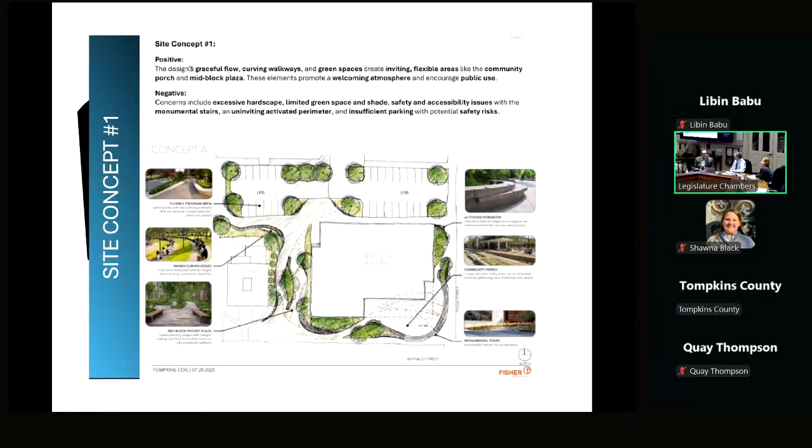Several months ago, we provided some initial sketches, and that's one of which you're looking at right now. These were inspired by local hydrology and geology. Can we go to the next one, please?

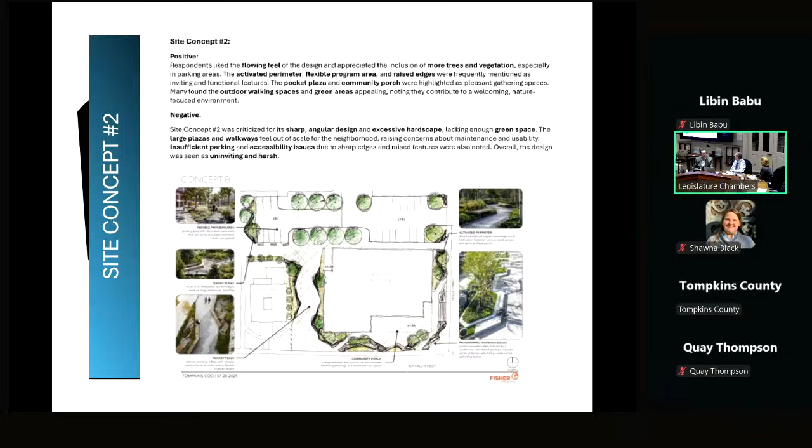We got some great feedback on these, and we also got some great information as part of the survey. Many of the things that folks provided us as important were already incorporated in the initial designs, but we used this feedback to further refine and produce a better design.

What you're looking at right now is an updated design that responds to the feedback as well as the updated building footprint. It incorporates additional requested elements such as secure bicycle storage, as well as locating and screening utilities such as an emergency generator, transformer, etc. And finally, it seeks to reduce the cost of construction while still fulfilling the initial goals of the project.

Some of the refinements we incorporated were to reduce hardscape, increase shade and green space, specific things we're responding to as part of the survey. The building perimeter is wrapped in plantings and built-in seating, stone seating. The main entry includes access both by stairs as well as a sloped walkway.

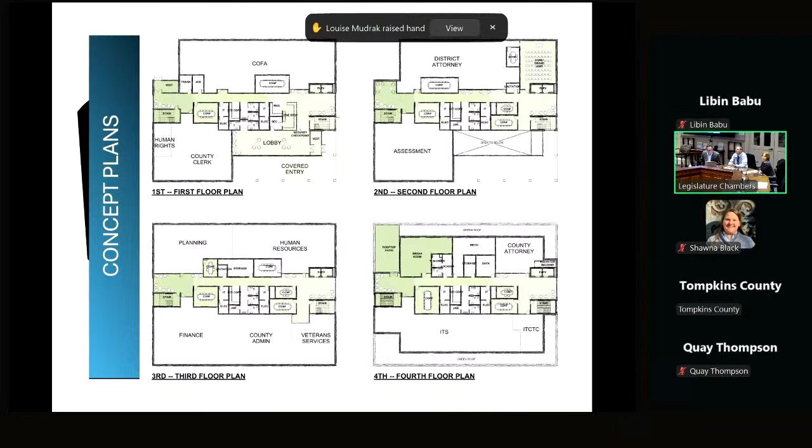It's me again. Thank you.

So I do have a question about the geothermal heating and cooling. I really laud that, and I've heard it might be a kind of neighborhood thing, so that other buildings like the Boardman House could take advantage of it. DeWitt Park is the formative park for the town and city of Ithaca, with churches around it since the 1820s. Are you only talking about putting in geothermal heating and cooling for this building as a separate unit system?

I can address that a little bit. Thanks for the question, Louise.

So we were hoping for a bigger district, but there were reasons that didn't work out. The next step we looked at was a smaller district with just county buildings on this block. One of the things we ran into is that the water table is higher than we thought, so you can only go down so far.

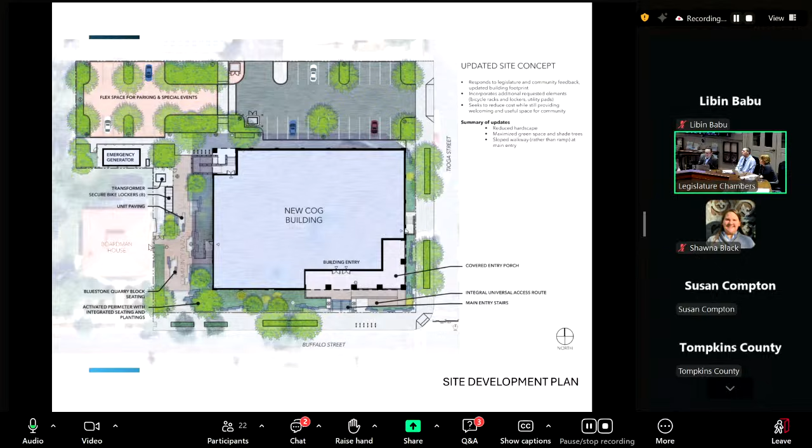Yeah, we believe it's between 28 and 30 feet. Okay, and what would be the measurement between the Boardman House foundation and the nearest piling? I'm assuming you'll be driving pilings down to support the building? No, we're drilling and then grouting, so there wouldn't be any piles, but the nearest borehole would also be 30 feet. Okay, but when they were driving pilings over on

Seneca Street, we could feel the ground move. And you're saying you're drilling, is there less vibration with drilling? Yes. So when you're driving a pile, you're literally just pushing it with a big weight down through the ground. When you're drilling, it's a spinning auger drawing the dirt and sediment up out of the hole as it drills.

Yeah, so I'm assuming you're taking that into account. Yes, no, they're great questions, and we should be well clear of any risk to Boardman or any other adjacent buildings. But having said that, we'll also be documenting Boardman and Courthouse before and after construction, and monitoring both locations throughout the drilling and construction to make sure we're not causing any vibrations that could cause damage to those adjacent buildings.

Okay, and one last question. What ended up being the final height of the building? I'm just wondering how much the Boardman House will be overshadowed by the new building. In the past I was told, in an earlier design, that we would have the space, the width of the current county building, next to us before the new building, but obviously it's a lot closer now. So the height of the new building? Yeah, I think it is.

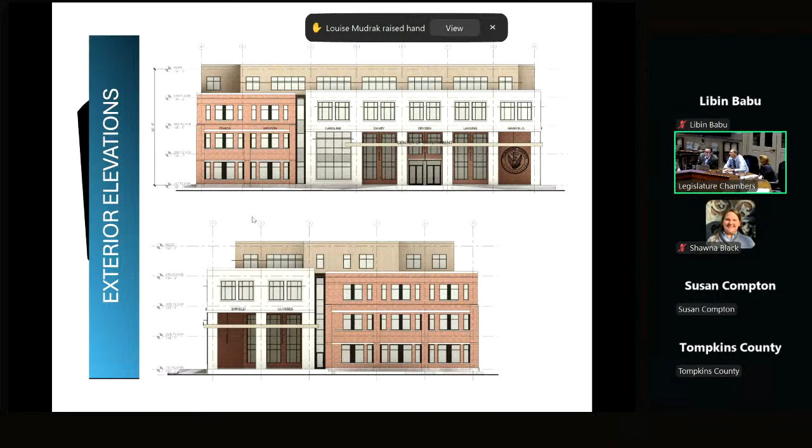I don't know if I can zoom in, but if you look at the top left, this image is really small. It's a 3-story. Here you can see in this elevation that we'll show later, that red rectangle, the 3-story red rectangle, is about the same size as Boardman. What we're doing, in the top left of this image, it would be nice if we can zoom in, but you can see the Boardman House in red. That's the closest sketch that we have. So here's Boardman, and here is the new Center of Government building. We're sort of celebrating and respecting this little square of Boardman with a similar little red square in our building.

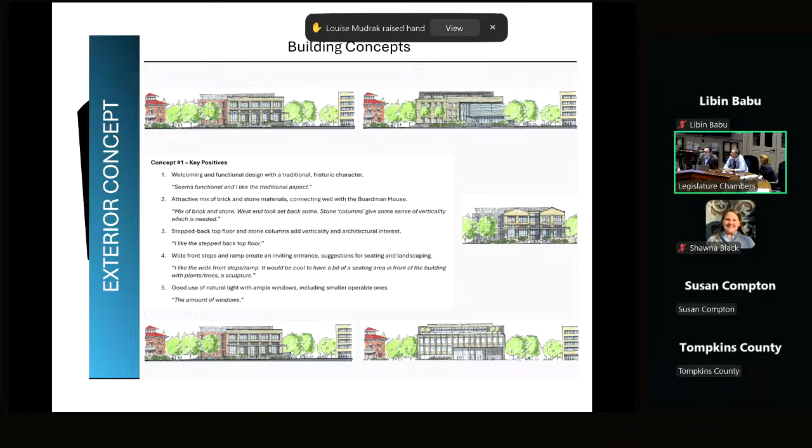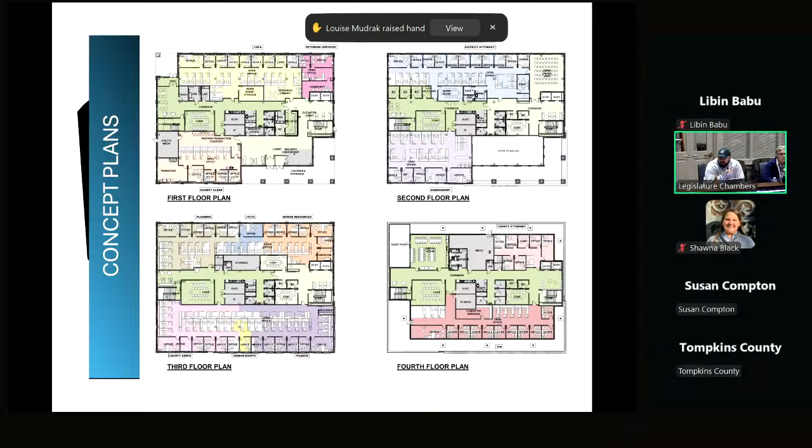That just warms my heart. Thank you. Is the new building further away from the Boardman House than the existing building? Oh, much farther, oh yes. And so to Susan's concern about shadowing, there's going to be a lot more space between, so there should be, in essence, more light that gets into that side of the Boardman than had been before. Yeah, absolutely, yes. Okay, that's fabulous.

Now, the only other thing I will add is we sometimes get icicles on our side of the building, so you wouldn't want a bench anywhere an icicle could fall on them. The old building was so close to us that icicles were a concern regarding people walking into the county building, that they'd be hit by an icicle. So just don't put the benches too close, or the bike racks. That's an appreciated point, thank you for bringing that up.

Our vision is that the project will put Boardman House back into DeWitt Park as a little jewel, so it'll feel like it's sitting more within the park rather than next to the Center of Government building. So the park sort of wraps around Boardman, and we're separating and celebrating Boardman within DeWitt Park. That's just fabulous. Thank you.

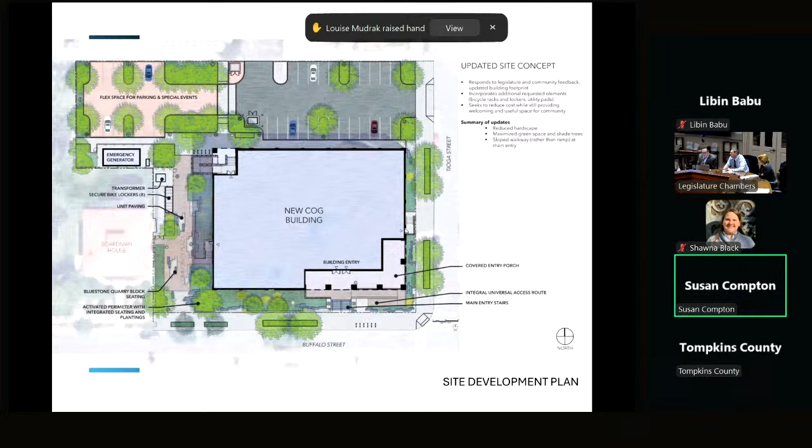Quay, I have a couple more questions for the Q&A. We have one that says, can people see outdoors from sitting? Seems important for a worker.

If you're sitting in your cubicle, you probably won't be able to see outdoors. If you have an office in the building, all of the offices are on the perimeter wall with glass walls through onto the interior of the building. If you're in a cubicle, there are probably half the cubicles that wouldn't be able to see out. But if you stand up from your cubicle, that's when we're designing towards. Your cubicle wall is probably 5 feet tall, and if you stand up, you'd be able to see out of the building. If certain locations need more acoustical separation than a 5 foot tall cubicle wall, we're recommending maybe a foot or 2 feet of glass at the top, so when you stand up, you can still see out of the building.

Another question was, will you be reusing building materials from the 3 buildings in the new building? Not all 3 buildings, but we're identifying things we want to reuse and celebrate in the new building. Specifically, there are a couple images Bernard will share of how we're reusing the grate on the front of the professional building, with all the round circles, and also the beautiful stair adjacent to that grate. Structurally, we can't repurpose that stair, and the rise and run aren't even code compliant, but we're planning to design the main public stair in this building to mimic how that was structured. So we're trying to draw from a lot of the features of those 3 buildings that have historical relevance and build them into this new center government building.

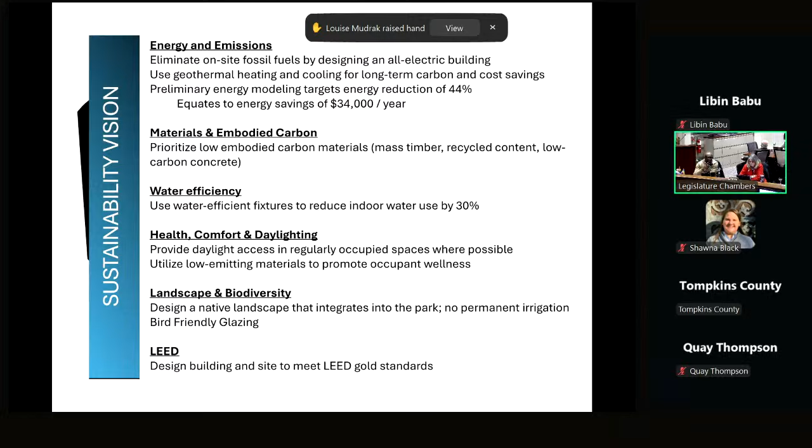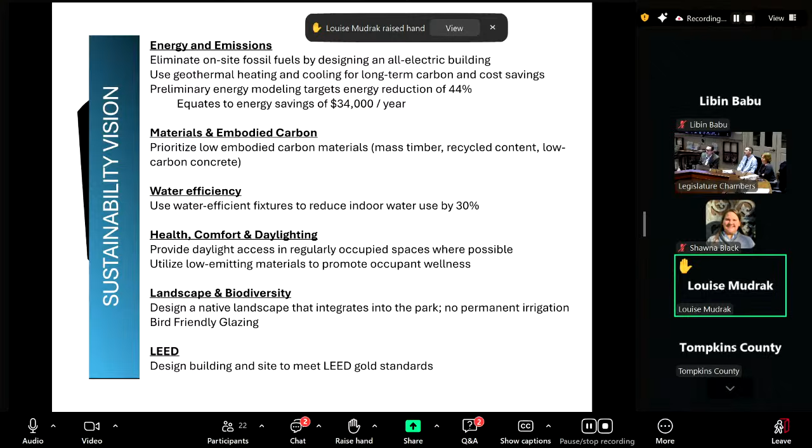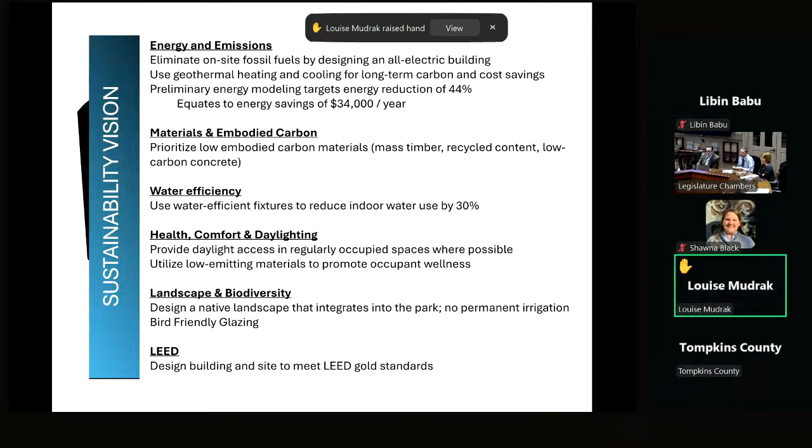The First Baptist Church is a national, state, and local historic structure. It's a gray stone, rough-cut building, made of materials that really represent our locale. We have to tuck point it all the time to keep it from cracking. So if you're going to instrument the old courthouse and the new building, please include us and let us know if there's anything going on, we would very much appreciate that, if that's possible. Also, I laud what you're doing, I think you're doing a great job. Possibility of public water could be somewhere between the Boardman House and the rear entry or something, so it could be shut off in the winter. Doesn't have to be a big expense item, but I think people would soon find it useful if you have celebrations or anything like that. Thank you.

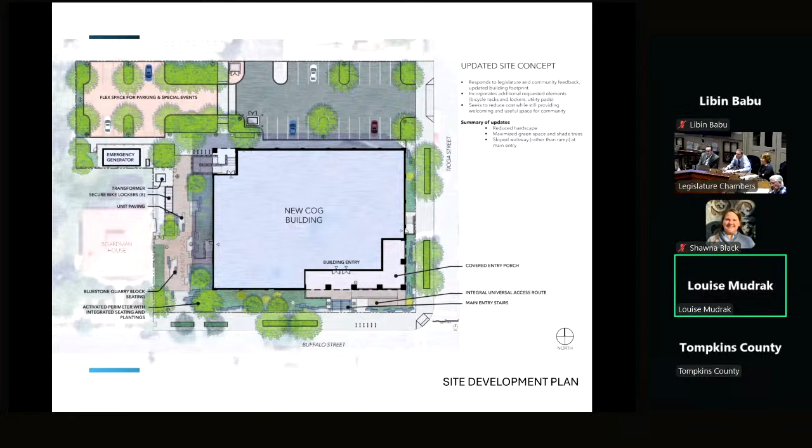I'd like to make a comment about DeWitt Park. The county doesn't own DeWitt Park, it's actually owned by one of the churches I believe, the church on the corner. The city of Ithaca maintains it, and not well. I think they should be thinking about putting water there themselves and maintaining that park better than it is now. I know the county would work with them any way we can with that.

I was going to respond regarding, as part of the deconstruction of the existing 3 buildings, we will also be monitoring, this is to Lee's point, seismic monitoring to surrounding buildings, especially your church and the Boardman House, putting monitors at each building so we can see if there's any vibration from any of the operations, principally through deconstruction, but also through new construction. We're not doing piles. That was something I asked our geotechnical engineers from the beginning, that we don't want to drive piles because of proximity to historic buildings. So the foundation system is a proprietary system, not piles. It's basically injecting the soils to bring them up to the soil bearing capacity needed to support a new building. So there's really no vibration because you're not driving piles. It's a little more money, but I think it'll save us money in repairs to adjacent historic buildings.

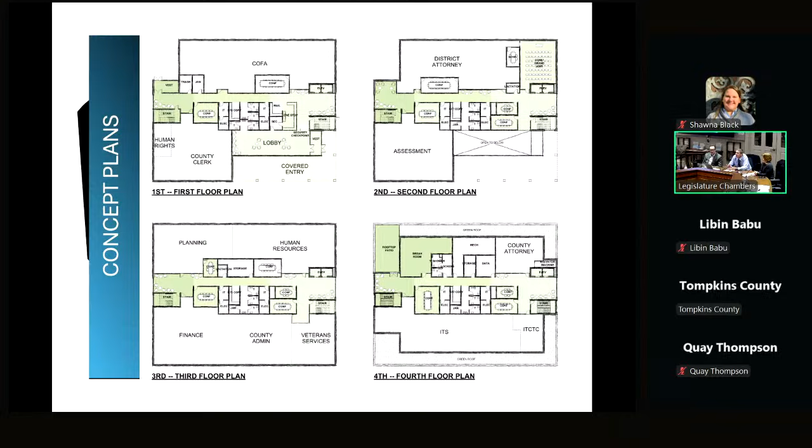All right, I'm just going to pick up on where we left off at the last community meeting, so I'm going to give a quick recap. The last time we were here, we showed the plans on the screen as a concept. The green areas you'll see are circulation, support, and shared spaces, and then you'll see how the different departments were called out at the perimeters of the building on the north and south side.

We've developed that a lot. We've had over 30 meetings with departments, and they will continue until we get that fully refined.

We looked at it more closely at each of the departments. On the first floor plan, we have the COFA, which is a good example of what we're typically doing on the north side of the building: perimeter offices along the top, exterior walls with windows, and open office inside of that, which will be flexible space.

In the flexible space, we're showing layouts currently, though furniture hasn't been fully designed, developed, and decided on. We're just showing it for fit, to show that we have the right number of people in there and future growth built into it.

On the south side, you'll see something very similar. We put some offices on the perimeter with exterior windows, and along the interior of all these offices there's more glazing to let natural light filter through inside as well.

The main areas here are the entry lobby, right off the plaza you saw at the site, carrying that through the building. Then there's a small public waiting area here, and some waiting areas here—we'll talk more about how those spaces are used. It has single corridor circulation throughout the building that moves into the suites, so we've minimized circulation space to make it a more efficient building.

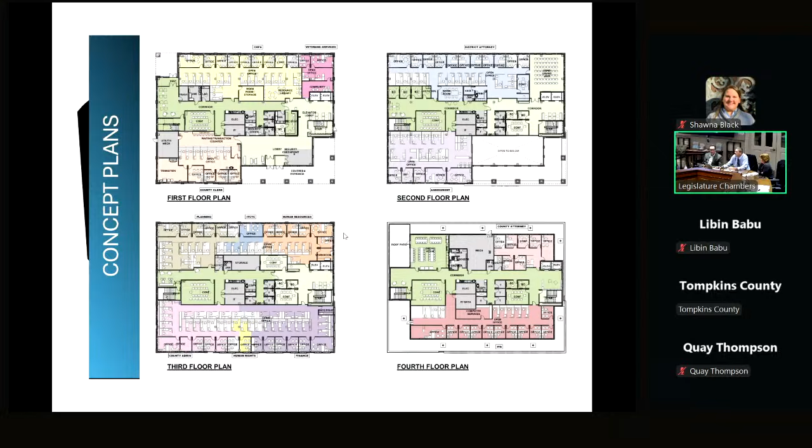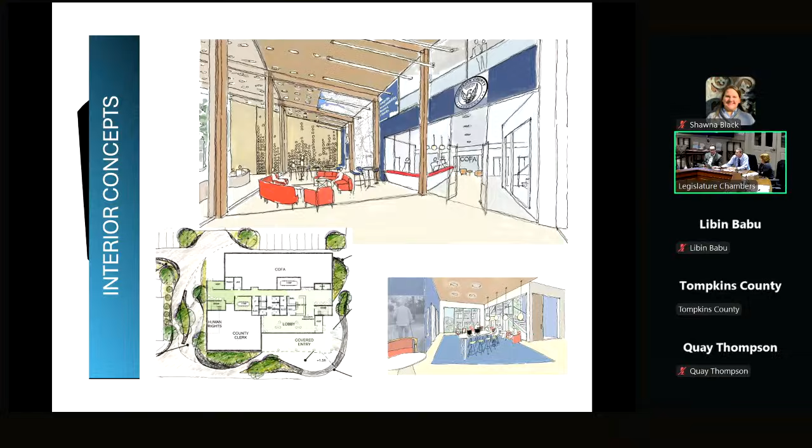These were sketches of the entry lobby, the interior, and a couple of those areas. It's been about 3 months since we last showed these preliminary concepts, and we've continued to develop this based on the feedback we got.

Here are some key things we heard about the lobby itself: it should be a large, usable lobby for the public and employees. The biggest requests were training rooms and community meeting spaces, so into our plan we built in small and medium conference rooms that are accessible from the public areas.

Public computers will be filtered throughout the lobby too. So not only do you have access to electronic forms, the idea is that you're right there where there's help at the desk if you're having trouble, while you're filling them out at the place.

Kiosks with information was a great idea that came up in one of the public meetings. They could filter upcoming events or different things you need access to, displayed there, and it could be ever-changing depending on what's needed at different times of the year.

There was also a lot of interest in the historic side of Tompkins, so putting in displays, artwork, and historical things. We're looking at monitors that can show the history of Tompkins and the site itself—we are removing 3 buildings, so showing some of the historical nature of this site, which has changed a number of times from residential housing into what you see now, and will change again. Some of that can be present there, as well as items we can salvage from the building that can be on display—I'll show you one example a little later.

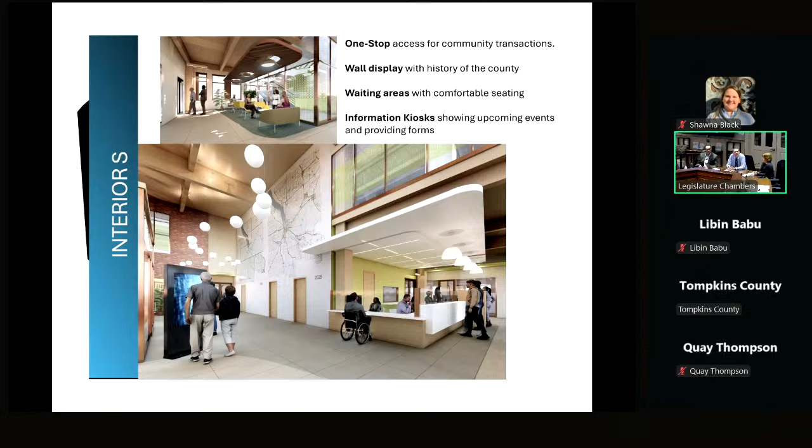What you'll see on the north is the public area. There's a typical public small waiting area right off the one stop, and that carries up through the 3 floors of the office spaces in the elevator lobby and this breakout. You can start to see the glass, and behind it, that is the grating that's on the professional building right now, being reused and put in there—currently over the glass at that building—just to pay homage to that a little bit. That would carry up through the 3 floors of the public stair that runs on the east side of the building.

Finishes are basically colors that we bring in. The color palette is warm whites and light colors drawn from nature—the taupes and greens that are out there. In certain areas, some wood would bring an accent into that, and then some of this layered stone possibly. That has to be developed more, but if we could mimic some of what we're seeing in the gorges, that would be terrific—maybe a rougher cut stone with a lot of depth to it.

And then lighting—we can play with the lighting to group areas instead of building walls everywhere. This whole flexible building we're building, the idea would be to break it out with color and lighting into smaller areas that are more comfortable as we go.

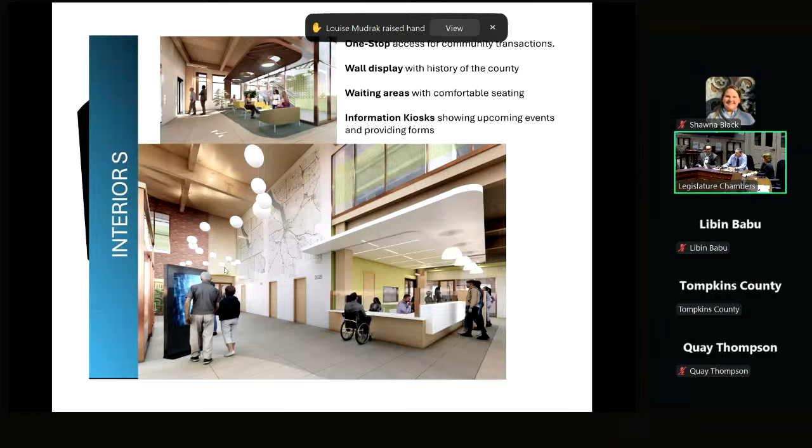I'll switch back a little to give an example. Here would be like the county clerk's entrance, and there could be small waiting here with some furniture as we go. That could, without dividing the lobby, just bring down a little bit of soffit lighting that could make that a more comfortable zone.

We're going to keep moving into the exterior, and then we'll pull all the questions about the design together at the end.

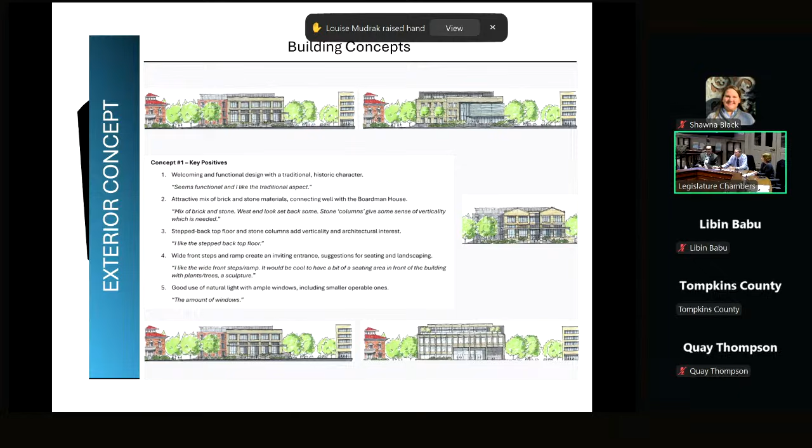People liked that step back. They also liked the front entry, which this didn't show, but more discussion showed a more grand stair ramp entry into the center of that building, and we started to accent that more. Then natural light was important, in the large windows that were there.

When we talked about the styling, the first response, almost 60%, was historic proportions with contemporary materials. But that was followed closely behind by historic civic. So we rolled this together as we moved forward, with that being over 80% of the comments focused on that.

This is the concept at the point we are now. Again, as Quay mentioned earlier, we're like 50% through design, so it's good for us to get feedback early now, so please do that.

The top elevation we're looking at is from Buffalo. This is that limestone entrance, and this is the raised plaza that is there. Then we break it up to bring the scale down and mimic some of what has happened at the Boardman House, slightly larger than that.

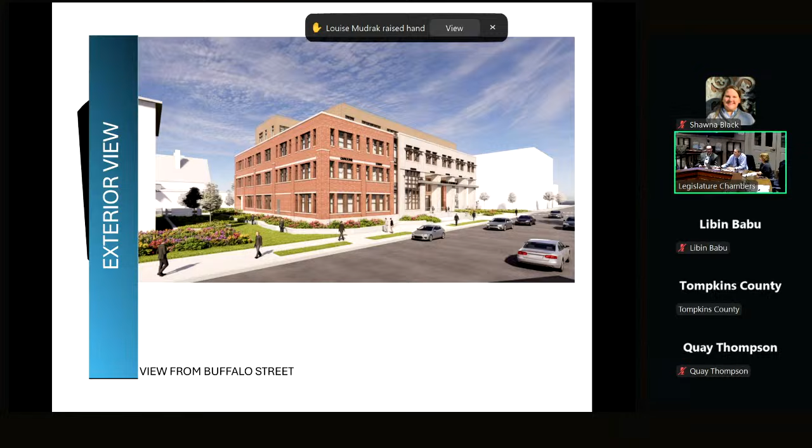Some of the features on here played off the comments we had. People liked the larger columns out in front that still played off what was happening at the main courthouse, in a slightly more contemporary way.

The scaling of that, we've reduced some of the glass that was here. Originally that was like a 2-story glass lobby, but a lot of the comments said, can we bring that down so it's more enclosed as we move into the space? The response was to carry some of the brick with larger openings, still letting in some light and brightening up the lobby.

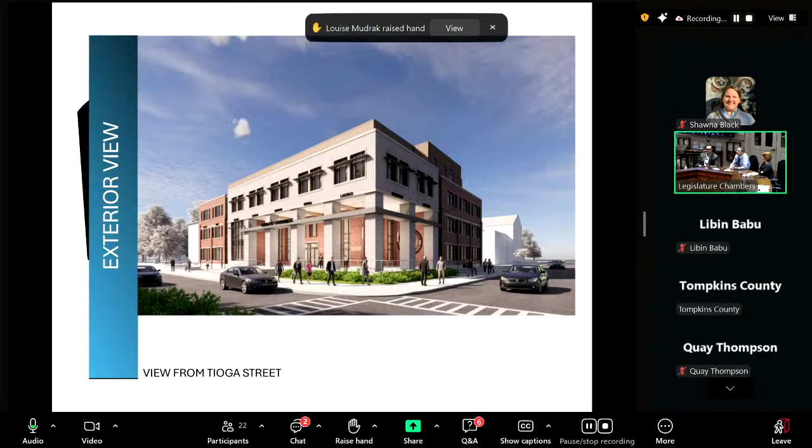And that is it for the interior and exterior to the level that we are now, so I'd love to hear comments and questions.

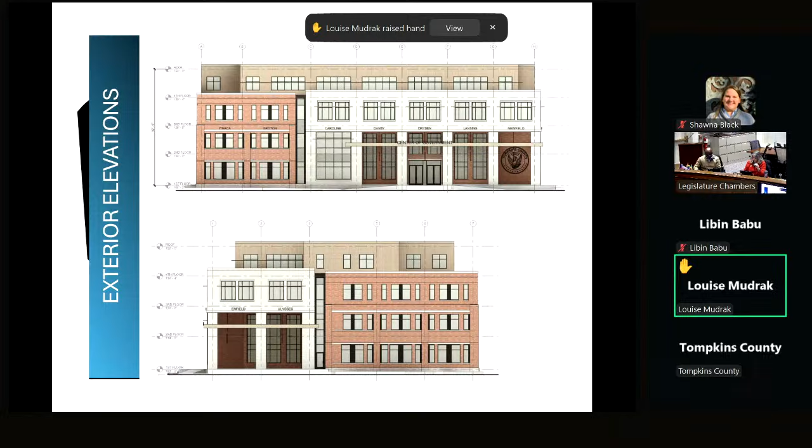My comment is, I liked a lot of the lighting, creating spatial places. My big underlined request is that handicapped seating be available. I know in a lot of the pictures it shows a person in a wheelchair, which I guess indicates handicapped accessibility, but there has to be seating for people with walkers, or other elderly people. Those seating aspects should be highly visible, and in proximity to where people might have to stand and wait in line in front of a window. Thank you.

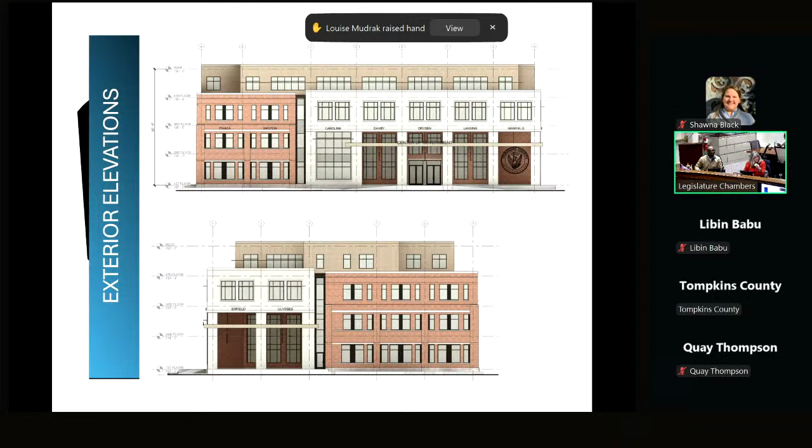Thank you very much. There are three design ideas that came up in the Q&A. One is to suggest putting offices with doors on the interior and cubicles on the perimeter. Just an idea. We looked at a lot of different ways to make this a flexible building that would sustain the county for the next 50 years, and that was one we were pushing for really hard, and we did a lot of tests to try to make that happen. You'd need a lot more cubicles and fewer offices to put cubicles on the perimeter, right?

In addition to the names of the towns in Tompkins County, could you have building mosaics or building medallions above the windows with outlines, stylized maps of the towns?

Yeah, we can definitely consider that, we'll put that in for discussion. This is very conceptual at this point. It was one of the comments we heard early on, that people liked that each of the towns were listed, but we haven't delved into the design of what that would be yet, so I think we should explore that more.

The other one is, if you are honoring all municipalities with names, which is a nice idea, remember that there are 10. The town of Ithaca and city of Ithaca are distinct municipalities.